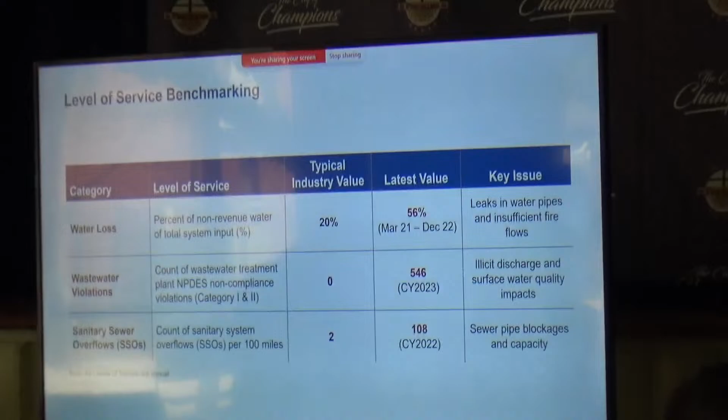So getting to the level of service part of this, just wanted to put this in perspective. A lot of these numbers are ones you're very familiar with, but we look at water loss, wastewater permit violations, and sanitary sewer overflows. From a level of service perspective, water loss is the percent of non-revenue water of your total system. A typical industry value for top quartile performance is about 20% or less. As you know, the Prichard system was at 56% in calendar year 22, so there's a lot of leakage in the water pipes and insufficient fire flows that we're trying to identify and prioritize.

On the wastewater National Pollutant Discharge Elimination System, or NPDES permit, the typical industry value targets 0 exceedances or violations. In calendar year 2023, the system had 546 violations, many related to monitoring and control, but some related to illicit discharge and surface water quality issues. Finally, on the sanitary sewer overflow side, a typical system might see 2 SSOs per 100 miles, and the Prichard system had over 100 in calendar year 2022.

So looking for those sewer pipe blockages and capacity issues as well.

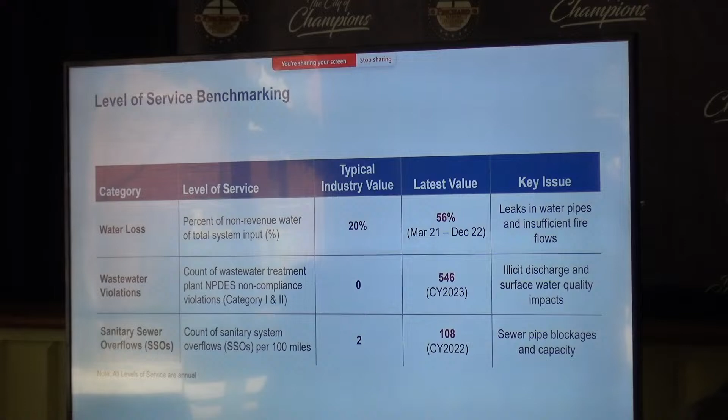Our risk assessment, using standard asset management approach, looks at two things: the probability of failure, which is the condition of the assets in your system, and the consequence of failure, which is the impact a system failure will have on the community and surrounding area. We combine those two things and multiply them together to come up with an overall risk score. So probability is condition, consequence is impact, and risk is the combination of those two.

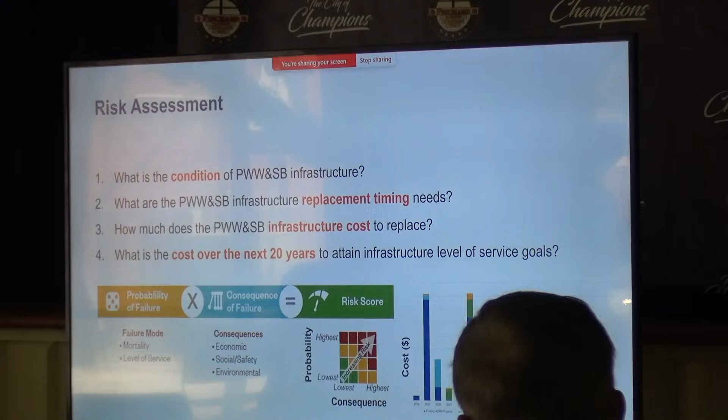At this point in time, I'm going to turn it over to Olivia August, who led our analysis of the linear assets in the system.

We've broken this presentation up into looking at the linear assets, or horizontal assets - your water pipes and sewer pipes - and then also the vertical side, which is all of your facilities: pump stations, water storage tanks, and wastewater treatment facilities. So at this point I'll turn it over to Olivia to cover our evaluation on the pipes.

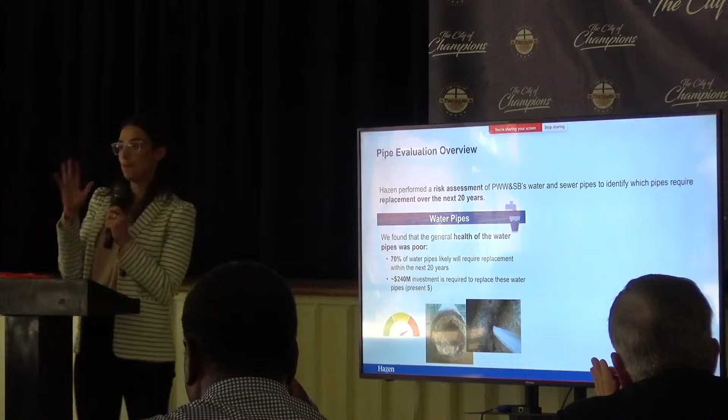Thank you, Ryan. As you said, I'll be covering today our assessment on water pipes and sewer pipes. I geek out on this stuff, this is what I do every day. As Jim said, we'll take questions at the end because this is kind of like a crash course in 4 months of work.

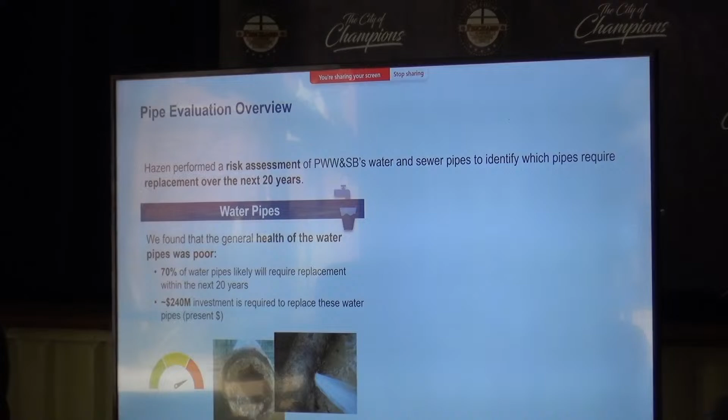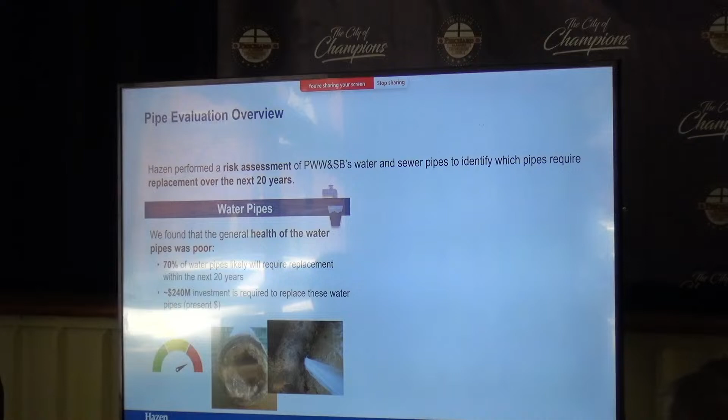Some overview of what I'll be presenting: we did a risk assessment and used that to inform replacement needs over the next 20 years. Starting with your water system, we found the general health of the system was poor. The first picture shows tuberculation, or buildup in a pipe that happens over time, meaning less flow can get through. This might result in pressure issues or insufficient fire flows, which are really critical. The second picture shows leaks - breaks or leaks, which result in extensive water loss.

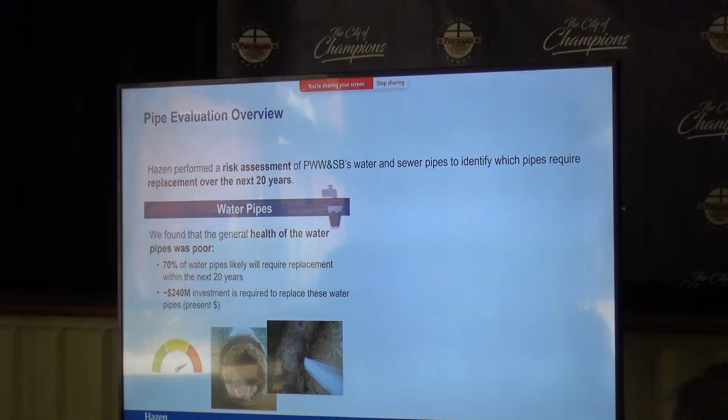Overall, we found that 70% of the system would be recommended for replacement over the next 20 years, and that total cost for replacement would be around $240 million. I'll talk a little bit more about how we got that number, but that's just an overview up front.

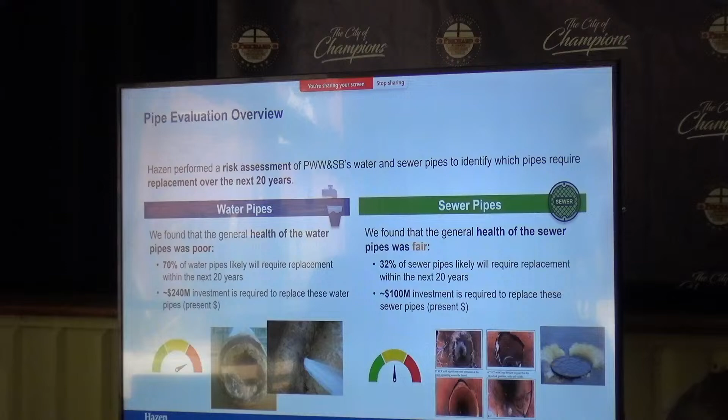Awesome. So Ryan gave a great background on how we calculate risk. We start with probability of failure, or what is the condition of your pipes. We can't go see them because they're buried in the ground - there are ways, but for our assessment, we looked first at data we had, such as the age of the pipe. That's really important in determining its condition, along with the material, whether there's corrosion potential, and known maintenance issues.

The Lovejoy Loop project is a great example where a combination of these factors occurred. The secondary criteria we used is more performance-based.

So we looked at modeled fire flows and head loss. We looked at historical sanitary sewer overflows. We also looked at the modeled pipe surcharges and force main velocity. And so that tells you your condition of your pipe.

But there's a difference between a small pipe failing in an open field and a large pipe failing under a major highway or in front of a hospital. And that's where consequence comes in. That says, what is the impact of this pipe failing? So not every pipe failing, the impact changes.

Some of the factors we looked at when considering that impact are: what would the impact to customers look like? What critical facilities are impacted? What are the impacts to the environment? Is this close to a creek that might be impacted if there's sewer flows? What is the traffic impact? What's the road that this pipe is nearest to? The constructability, how easy will it be to repair the pipe if it does fail? And then, of course, the financial impact of that failure.

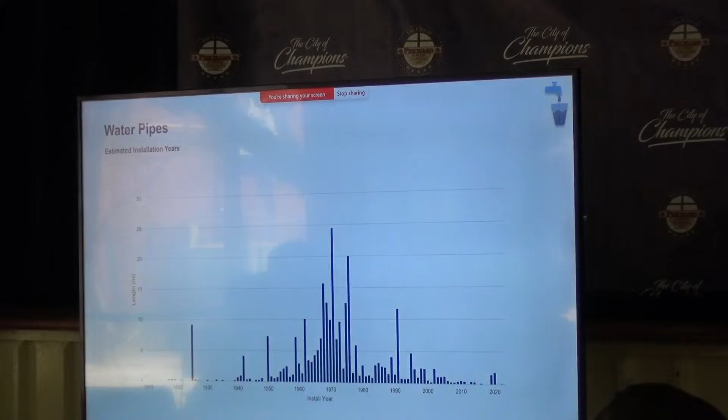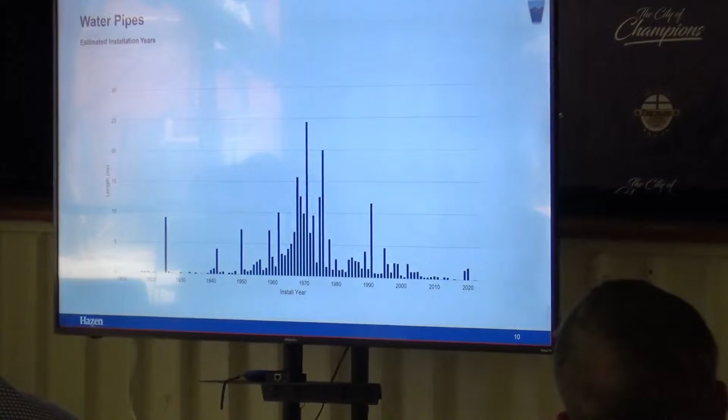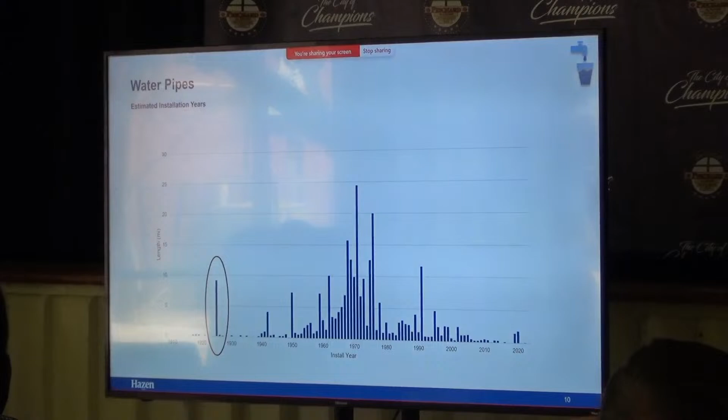Another factor when looking at calculating the condition or the probability of failure of a pipe is the installation year, or the pipe's age. You can see here the installation years of the water system, a majority installed between 1960 and 1980. However, I do want to point out that there's a significant portion of the system too that's installed as early as the 1920s. And so age is an important factor when considering condition.

As Ryan mentioned earlier, those are the ones you want to prioritize right away. You want to minimize the risk of your system. But when looking at it, because the second half of what we did was also projecting the next 20 years, risk is a component, but a larger one of what we use for calculating the next 20 years of replacement needs is that condition or the probability of failure.

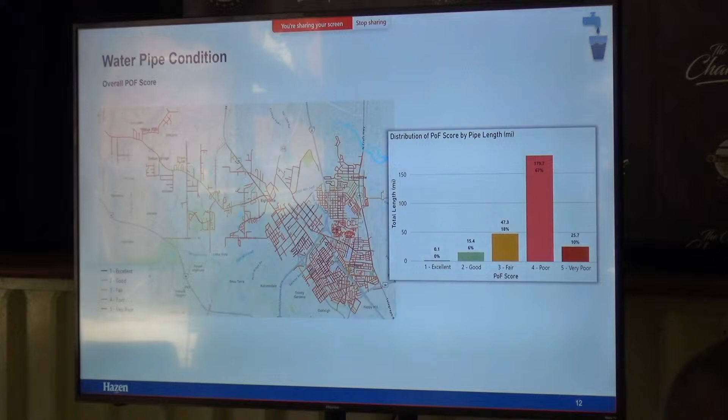So this map here shows you your probability of failure. You'll see over 70% are 4 or 5, meaning that they're either in poor condition or very poor condition. So this is really what drove our replacement recommendations, which you'll see in total we're recommending 188 miles of pipe replacement, approximately 70% of the water system length, which if replaced today would be around $240 million.

I also want to highlight, you've already started on some of this work. There's 8 million dollars of projects like the Lovejoy Loop that are already in process to address some of your highest risk pipes in the system.

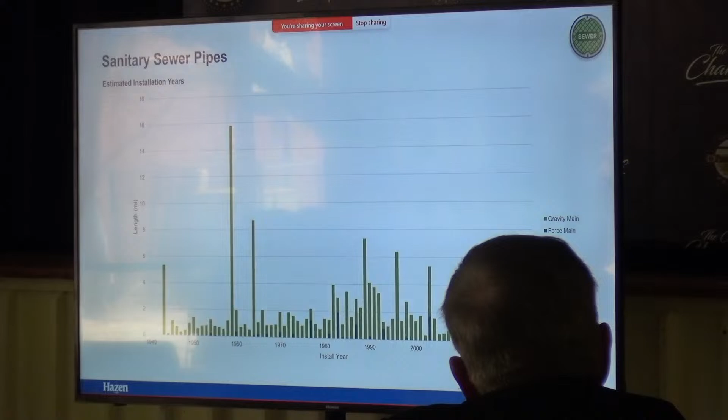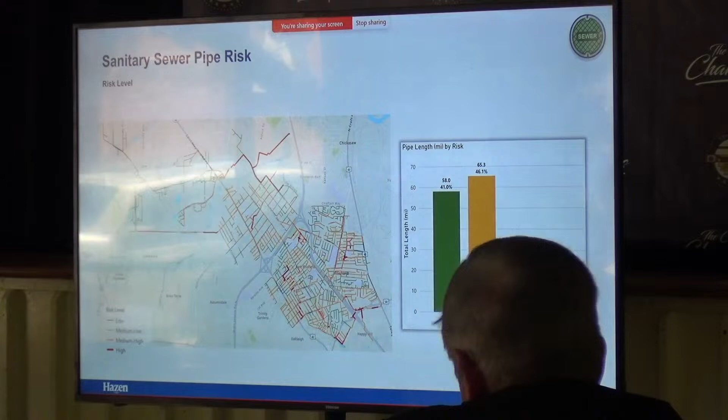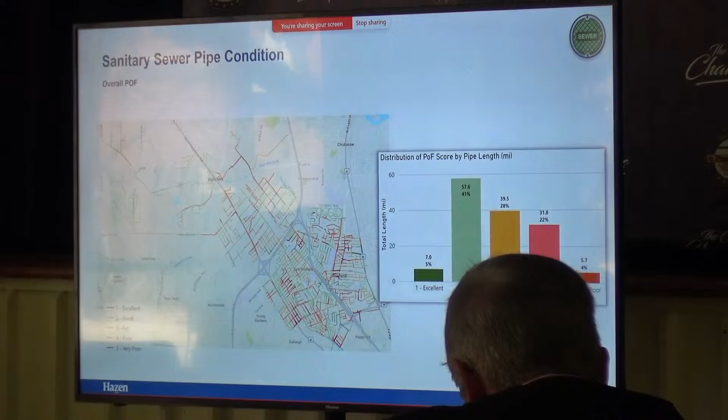That's a snapshot of today. To project the next 20 years of needs, we focused on the condition or the probability of failure. You can see here approximately 30% of the system is either in poor or very poor condition. These are what drive our recommendations for replacement over the next 20 years.

That inflated value is closer to $144 million. So what that means in a yearly investment, that would be close to about $5 million per year in sewer pipe replacement that would be inflated over time.

So I wanted to mention as well, as part of your water system evaluation, there's an ongoing leak detection assessment that ASTERRA is performing. That's going to give you really granular data on where the leaks are, so you can prioritize replacing water pipes based on greatest leaks. We're recommending that a similar assessment is done with your sewer system.

So a condition assessment program would look something like a camera inspection or a CCTV of your sewer pipes. This can typically be done each year, a portion of your system, so maybe over a 10-year period, you have camera inspections of all 100% of your system.

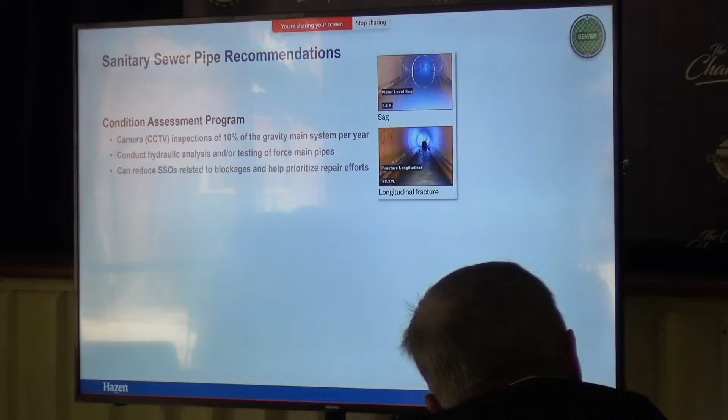And what this really, the information this gives you, it's boots on the ground or a little robot camera in the pipe showing you exactly what the condition is. Oftentimes you'll find that a pipe you thought needed full replacement, maybe it just needs to be lined, or maybe it's a point repair. So this information will give you better refinement into your replacement needs and will ensure that pipes with the greatest structural defects are being prioritized for replacement.

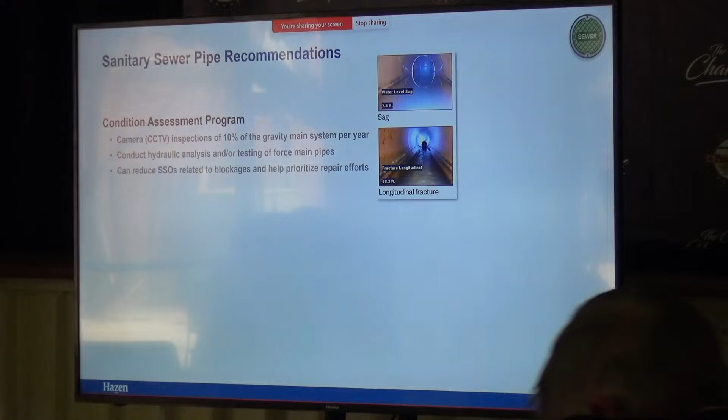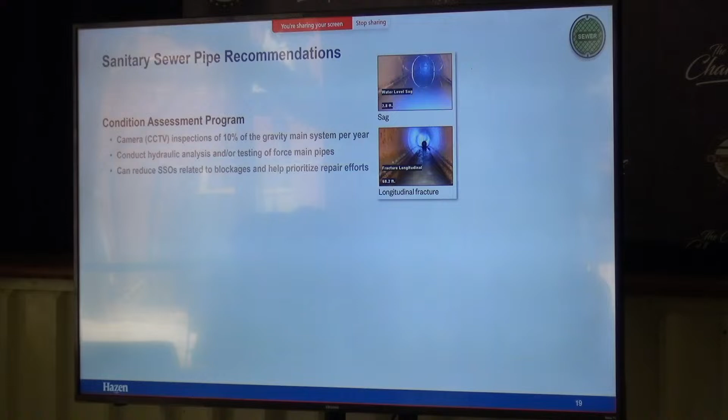Additionally, a benefit from this is also reducing sanitary sewer overflows. Oftentimes they can be caused by blockages in your system, and identifying those through these camera inspections can be very helpful in determining and removing those blockages before a sanitary sewer overflow can occur.

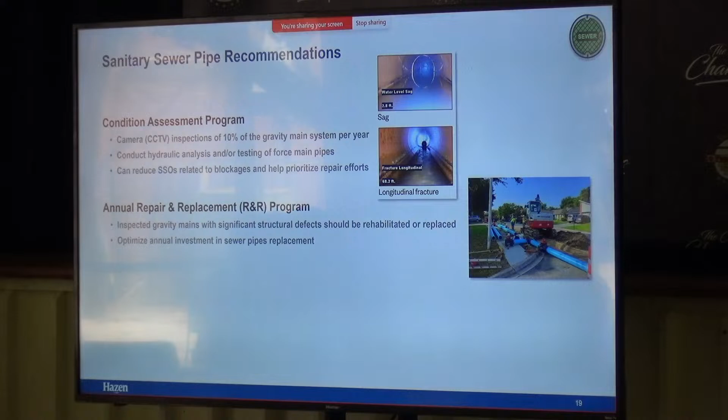So we're recommending that force mains and gravity mains are assessed, and that information can be used to inform an annual repair and replacement program. So this would use the results of those condition assessments, take the highest priority that was found based on the assessment, and that would be the priority for that year's replacement.

What this does is it optimizes your investment. It makes sure that every dollar is going to the pipes with the greatest need, and that you're spending the amount of money that's needed, fine-tuning what that replacement might look like.

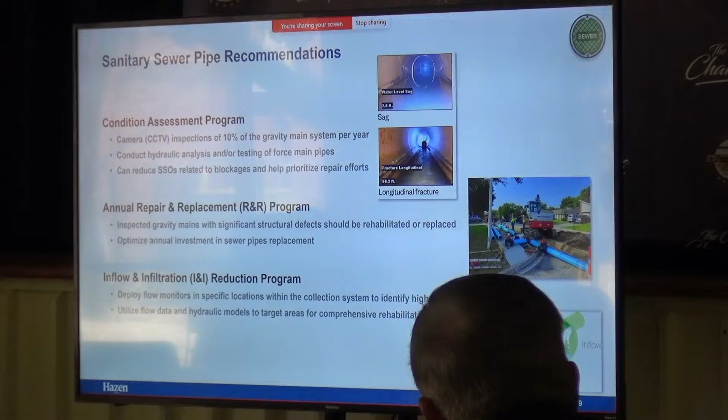The last program I want to recommend is inflow and infiltration. So what inflow and infiltration means, and I kind of showed you a picture in earlier slides of cracks in a sewer system, is when groundwater or stormwater actually enters your sewer system. The issue with that is sometimes it can overwhelm your wastewater treatment plants. A lot more water and flow is going to them than they can handle.

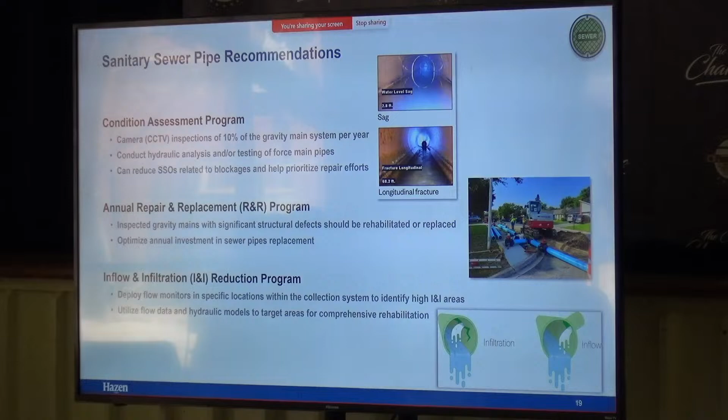The second is that it could also reduce the capacity in your sewer system. So the sanitary sewer overflows I talked about earlier could be exacerbated by the stress the inflow and infiltration are causing. So our recommendation is combine flow monitoring with some hydraulic modeling to really identify where in the system this is a problem, and then targeting those areas with comprehensive rehabilitation.

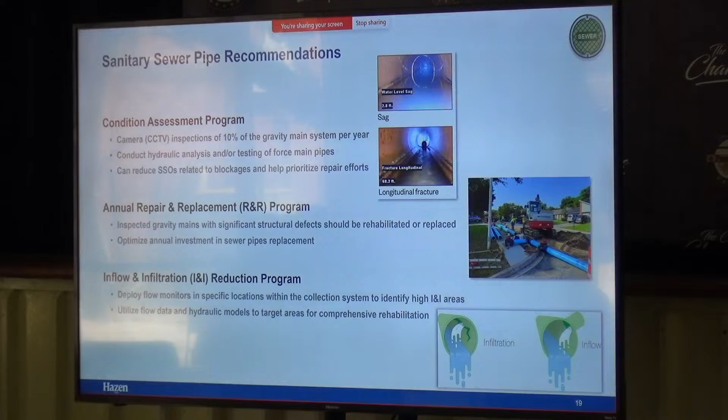All right, and with that, I will hand it over to Shelby to talk about your facilities.

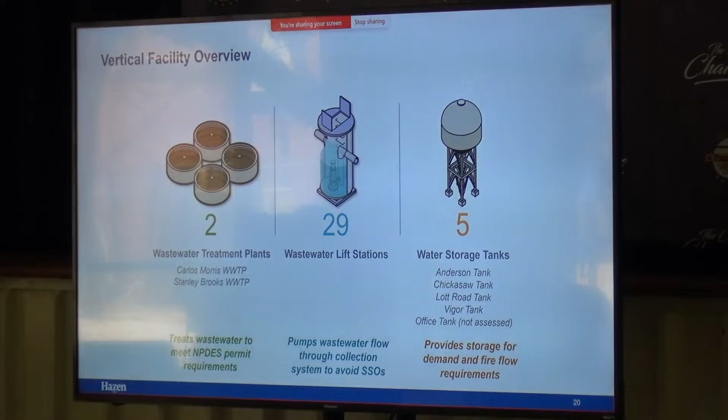Yes. Okay, awesome. So Olivia just walked through the piping system for Prichard, and now we're going to shift gears a little bit to what we call vertical asset management. And what that is focused on are the different facilities that are within your wastewater and water treatment systems, and all of the equipment that is comprised within these facilities. So the good thing about vertical assets or equipment is that we are able to visually assess these.

They're not buried infrastructure like piping. So Hazen mobilized a field team that went on site and performed condition assessment at the various facilities listed on the screen, starting off with 2 wastewater treatment plants, Carlos Morris and Stanley Brooks.

The purpose of wastewater treatment plants is to treat wastewater to make sure you're meeting NPDES permit requirements. We also assessed 29 wastewater lift stations. These lift stations pump flow through your wastewater collection systems to the treatment plants.

In addition, there are 5 storage tanks for your water distribution system. Hazen only performed assessment on 4 of those since the office tank is planned to be taken offline and demoed in the near term, so that was not assessed by our team. The storage tank provides storage for demand and also fire flow requirements.

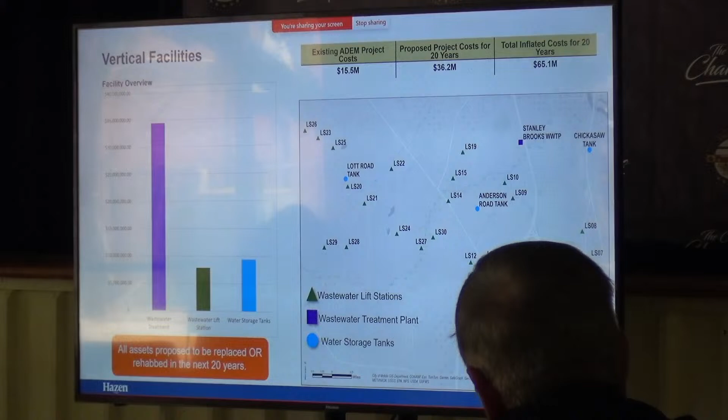So in total, over the next 20 years, these costs come to a total of $65 million, and we will get into the specifics for each of the different facility types.

The treatment plant was found to have some deficiencies with treatment. What does that mean for you all? With treatment deficiencies, wastewater is coming into the plant, and if the plant is not able to treat the flow to the adequate levels required by the permit, there are going to be illicit discharges into waterways.

So all of this is just saying that the treatment processes are not adequately treating the wastewater. There's stress on downstream processes of the plant, but also discharging wastewater that has not been treated to requirements. There were some other deficiencies noted on site, like flooded vaults, caving sidewalks, and a failed hydrant as well.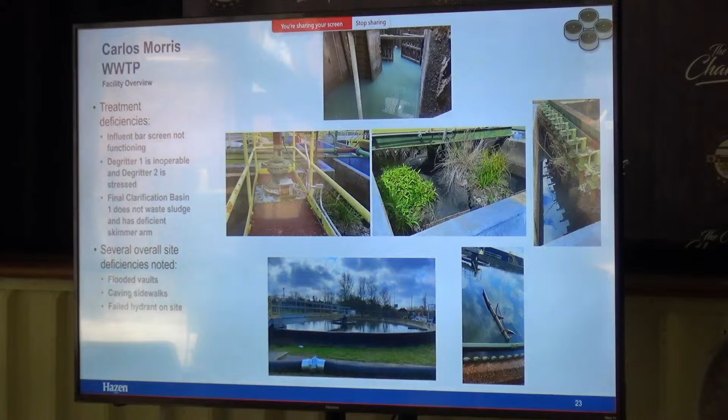And there are some projects already underway. John had opened up discussing some of those projects currently being designed for the Carlos Morris wastewater treatment plant, addressing the influent pump station and degritter structures, which you saw some pictures of on the last slide. In total, there will be around $20.4 million worth of improvements required for this plant.

That was something noticed throughout this plant - several dismantled assets or equipment not able to treat the wastewater the way it should, because there are missing components critical for the process to work. In addition, there was a trickling filter that was not functioning as a treatment process, and flow was really just passing through that particular basin.

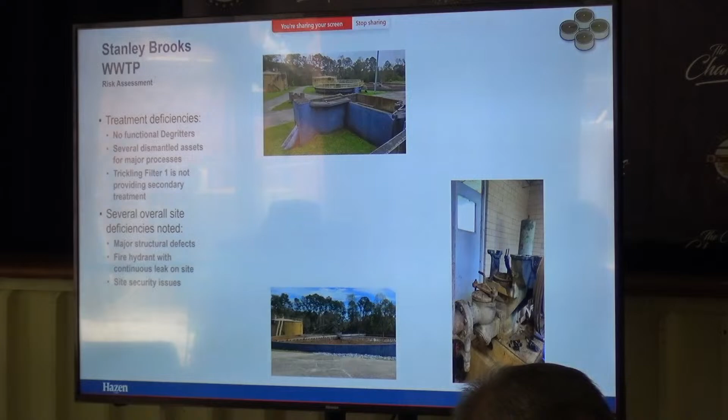Some other deficiencies were noted on site: several major structural defects, some hydrants with major leaking issues, and some site security issues.

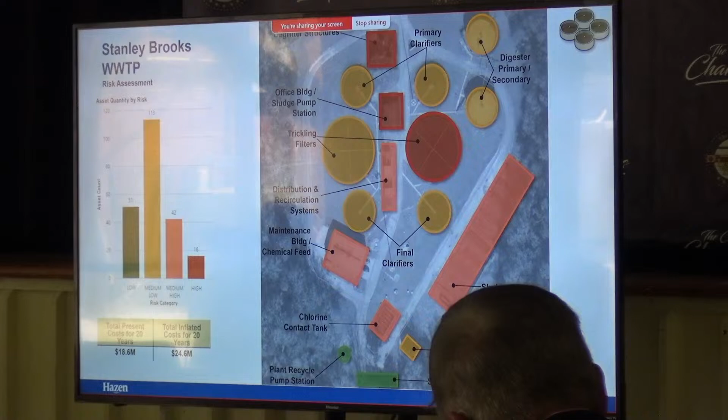This is the overall map for Stanley Brooks wastewater treatment plant, drawing your attention to the red and pink areas for different processes that had deficiencies to be addressed in the near term. For the next 20 years, the cost is around $18.6 million to address those in present value, but if you inflate those dollars over the 20-year period for the timing they may be incurred, that's closer to $25 million for Stanley Brooks.

For sewer lift stations, the one thing I'll mention is that their primary goal is to pump flow in your collection system, so the pumps are the most critical assets or equipment within each of these facilities.

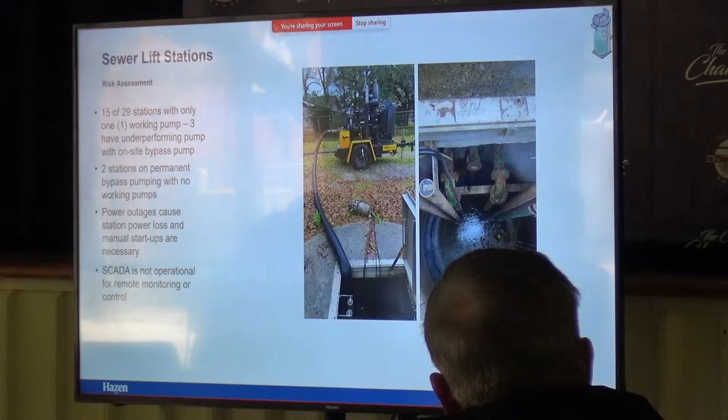15 of the 29 stations visited only had one functional pump, when 2 or sometimes 3 is typical at a lift station. This means there is severe stress on pumps where one is out of service. Several stations were being supported by bypass pumping, and 2 stations were fully supported by bypass pumping with no operating pumps on site.

This is a picture showing you bypass pumping. Bypass pumping is expensive, and it's not really intended to be a long-term solution - it's meant to provide relief in specific use cases.

Another deficiency noted for sewer lift stations was with power outages. When power is re-energized back to the system, the lift stations have to be manually prompted to turn back on. That was a problem, as well as the ability to monitor the stations remotely, which is important for keeping tabs on any alarms that may come up.

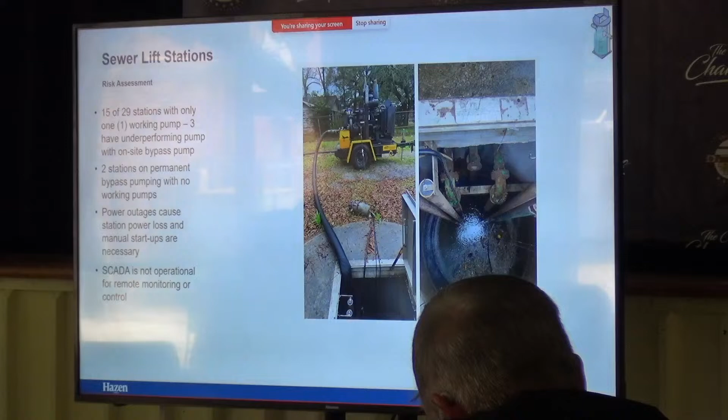The last group of assets I'll talk about is water storage tanks. All of the tanks are part of projects already underway, which John mentioned earlier, requiring recoatings to restore the structures, as well as several valve replacements or installation of new valves for better system isolation and control, and also SCADA improvements for the tanks.

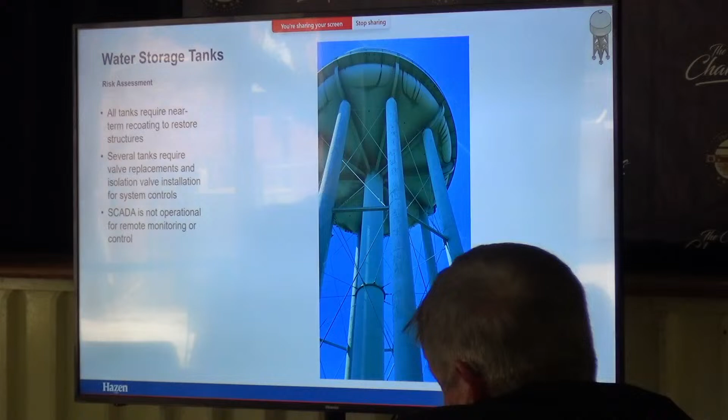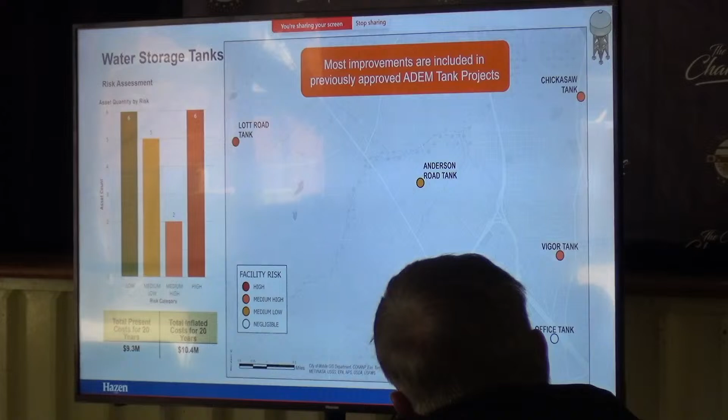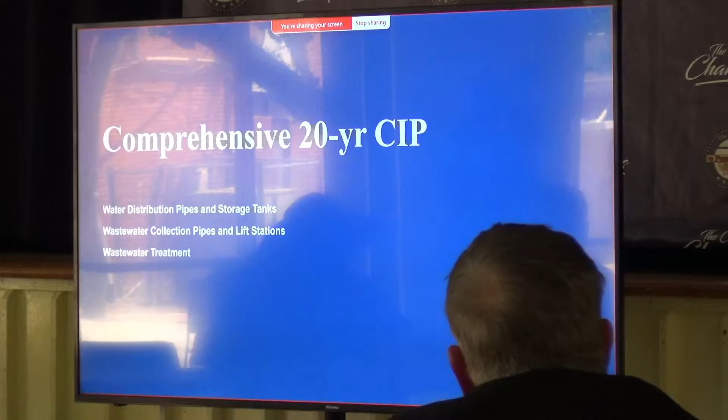Now, Olivia talked through the piping section, and I talked a lot about your different facilities in your system. Now we want to make sure we're communicating comprehensively what that need looks like for wastewater collections, treatment, as well as water distribution.

This shows the breakdown of combining your pipes as well as the facility needs for the next 20 years. Overall, for the next 20 years, in present dollars, that need is around $405 million. And if you look at what the inflated costs would be, knowing some of these projects are midterm or more long-term out in that 20-year projection, that cost comes to a total closer to $550 million.

On average, for the systems we've discussed - wastewater collection, wastewater treatment, and water distribution - this means around $20 to $21 million is needed to be invested into your systems per year.

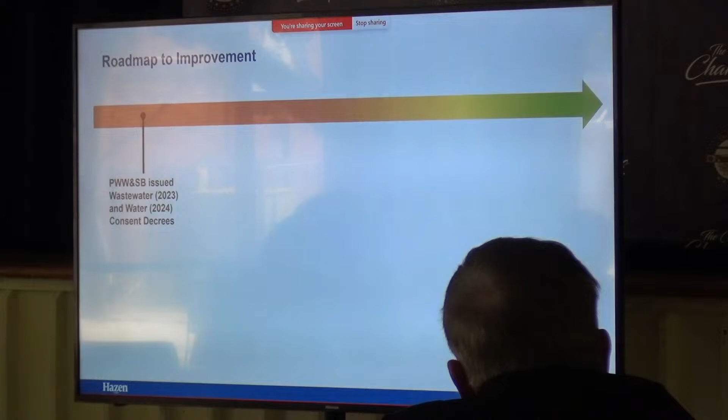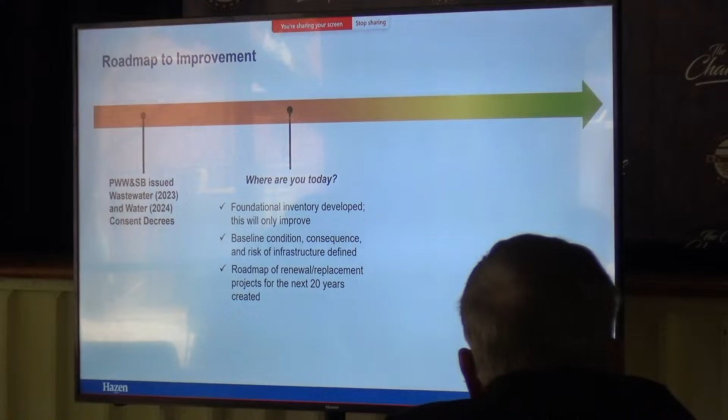So just kind of rounding out the roadmap to improvement of the system. As you're well aware, we issued the wastewater and water consent decrees over the last couple of years. Moving into this assessment, we've done the foundational inventory. That'll only improve as continued work occurs within the system. As part of this study, we've developed the baseline condition, consequence, and risk assessment results for you, and laid out this roadmap of renewal and replacement needs over the next 20 years. And then where are you headed?

Well, as Olivia talked about, continued flow monitoring. We have flow monitors in the system, leak detection. You do have approximately $6 million of projects that are already approved by ADEM for funding of the storage tanks and other facility projects. We do advise that, as John mentioned at the beginning, we were able to get our eyes on all of the facility and vertical assets.

The assessment that we did on your pipe network was based on available information and industry knowledge of how pipes degrade. So we do recommend that some detailed condition assessment be performed on your critical pipes, your most critical or highest risk pipes, just to validate the findings and calibrate the model that we developed. And then implementation of the proposed replacement projects, starting with those that mitigate the largest amount of risk for your system. We also know there's financial and affordability work going on, and we want to make sure this needs assessment fits the affordability limits that might be available from the customer base as well.

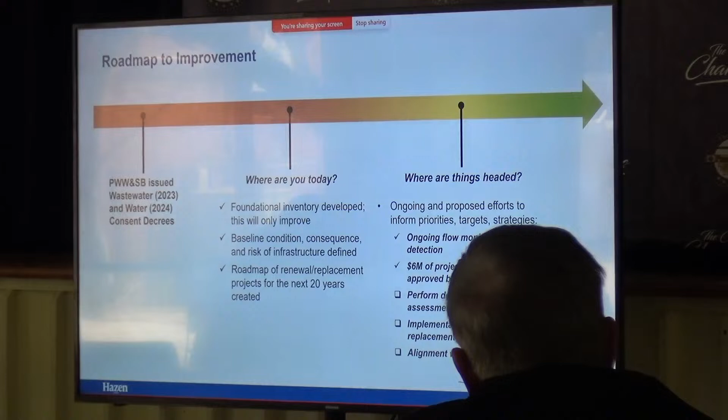So there's still some work to do to see how we lay out this program in a realistic fashion. But we do have all of the information that you need to really prioritize those projects at this point.

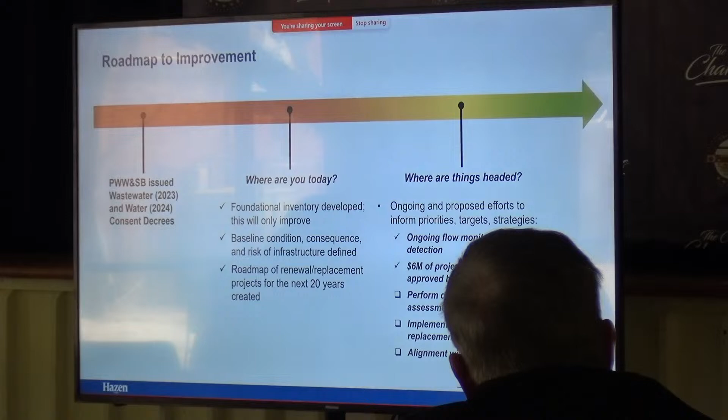And before we transition to the water source alternatives discussion, we wanted to pause and see if there were any questions that we might be able to answer on the asset management section first.

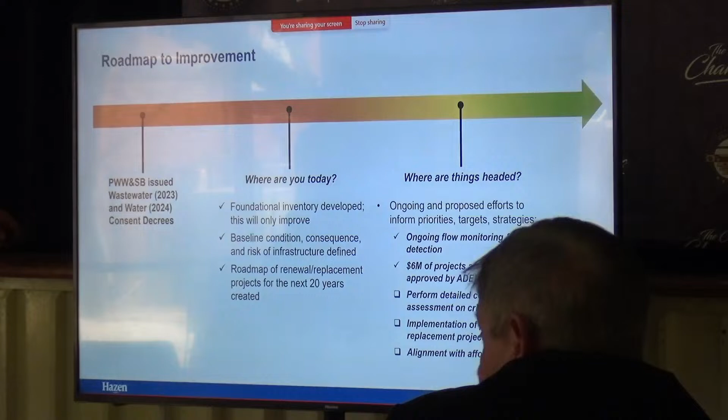So let me jump in here for takeaways. Of course, the big takeaway is $20 million a year for the next 20 years, and that $20 million is present worth, that goes up every year with inflation. That's $12 million on the water system, $5 million on the sewer pipes, and another $3 million on the facility assets.

I've tried to be as transparent as I possibly could since I came here. I said in one of the first meetings, I've operated hundreds of water systems all across the country. The condition of this water system was as bad as any water and wastewater system I'd ever seen, and this kind of verifies it. To have to spend $20 to $25 million on a system of this size is huge compared to other systems around the country. But there's a reason for that.

As you saw from when the pipe was put in, when sewer pipe was put in, there's not been investment here. This has been decades of lack of investment and, frankly, decades of mismanagement that resulted in this. So we're now paying the price.

And obviously the challenge moving forward, the challenge we have as a group, and I have to make an alternatives evaluation and recommendations by the end of July, is how do we achieve this? Given the financial capabilities of this community, this is going to be very, very tough to achieve without a lot of help coming from the outside.

I'll just kind of leave it at that, because you'll also see as we go through the water source evaluations, we're also paying the price for past sins. I don't know how else to say it, the lack of investment and mismanagement. That's going to impact the water source as well, and we'll talk about that when we get through. But any questions, Dr. Morse?

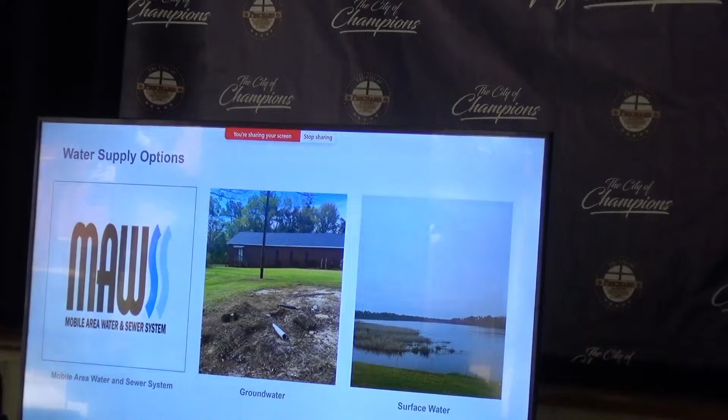So I'll go through these quickly. On the water supply alternatives, which is required as part of the consent order, we looked at 3 different supplies: staying with MAWSS, going to groundwater, or looking at surface water alternatives.

As far as water supply goes from MAWSS, I think everybody knows the story, we pay about $2.75 per 1,000 gallons. MAWSS has been supplying Prichard for quite a while. We've contacted MAWSS and talked to them about standing capacity, which is something we'll discuss a little bit more later. They're not really concerns, but there are conditions that in the long term MAWSS can increase their rates, and we'd be subject to those rate increases as well.

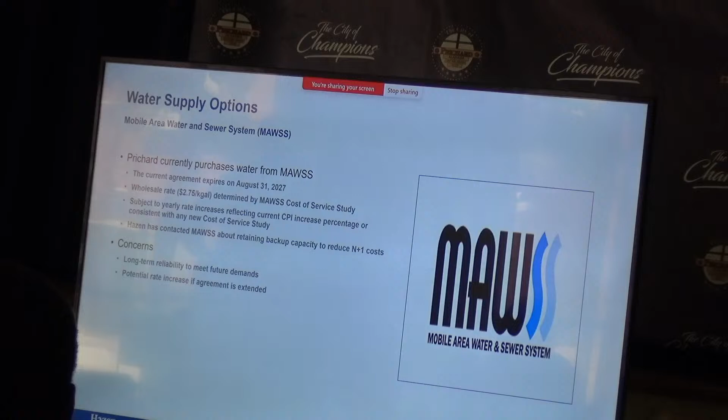To take care of the other one quickly, surface water supplies are pretty limited here in southern Alabama. Big Creek Lake is really owned by MAWSS, all of the capacity in that system is owned by MAWSS. Also, if we were to build an intake, if they would allow us to build an intake and put a pipeline in all the way to Prichard and then treat the water here, that would be a surface water treatment plant. It's a very expensive, complicated plant to build.

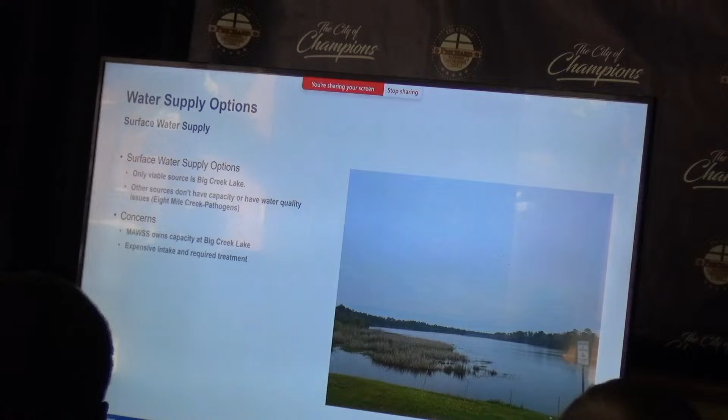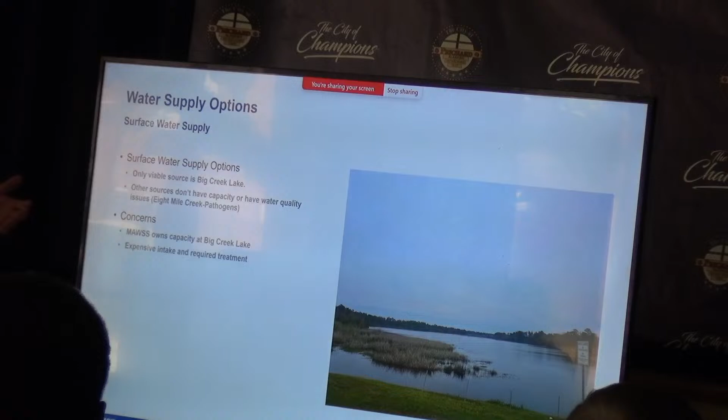We're going to talk about groundwater plants, which are much easier to build, you can build the wells here in town. But a surface water alternative, just qualitatively, is very difficult to conceive, so I just point that out. As far as groundwater supplies go, there is limited data here in the area, but there are some old Scott paper wells I found out about today.

Kimberly Clark has had a well system in southern Alabama, so we have contacted them. We also did a test well project last year where we looked at what well capacity could be. The water quality isn't that great for groundwater.

It's high in iron, it's relatively high in manganese, which could actually degrade once we started pumping out of the systems. It's relatively low in pH, which also translates to some infrastructure issues. The pH of this groundwater is pretty low.

We've contacted ADEM and we've talked to them about drilling permits. They have gone to a more nationwide program, a nationwide paradigm, where they're looking at the technical, management, and financial capacity of an entity to be able to run their systems, both technically and from a management perspective.

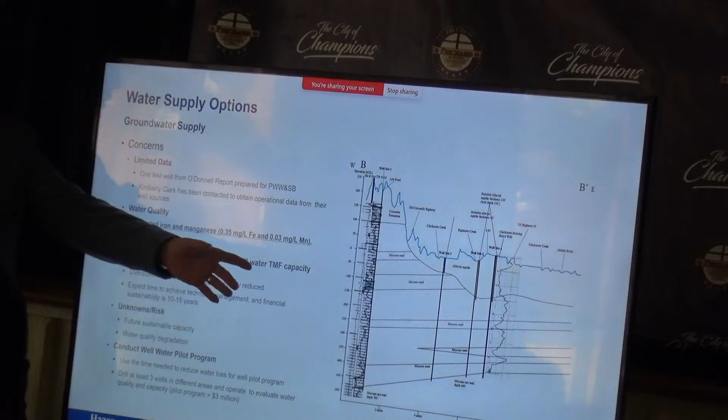So their comment to us was they probably would not issue a drilling permit until we had satisfied the requirements of the TMF paradigm they're working within. So that would probably take about 10 to 15 years for us to satisfy those.

One example would be: did we go in and look at the wells and make sure they had the yield and water quality over the long term that we could sustain and treat? And with some of the things Olivia and Shelby were talking about, could we get the water losses down to a number more in line with the national average, say 20% or 15%, on the drinking water side? So those two things don't make groundwater impossible, but they push it out in the timeline.

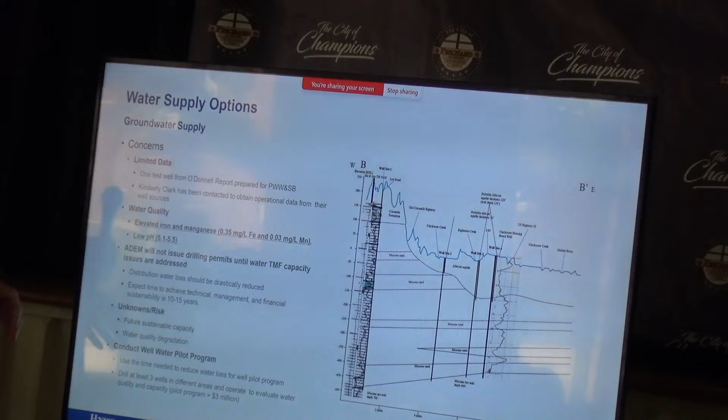And again, I've mentioned the sustainable capacity, the water quality. In order to deal with these issues, we would have to do a pilot program where we would drill some wells and actually look at what the water quality would be and what the capacity would be over the long term.

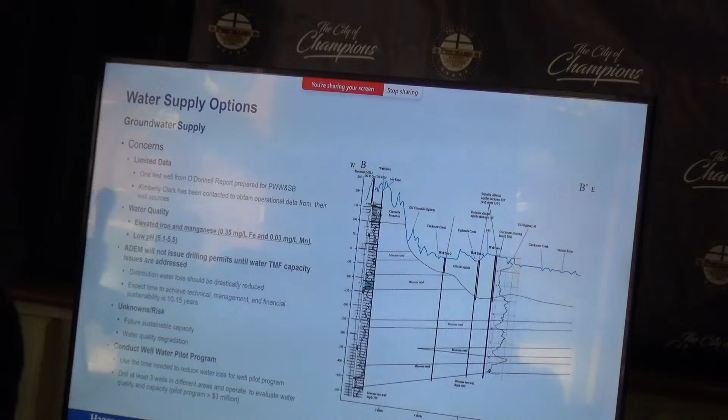So with all that said, we looked at the water quality and the typical treatment schemes you'd use for a plant like this, or a water quality like this: sequestration, which we don't really think is possible because of the water quality conditions; aeration and filtration, which is a possible alternative; chlorine oxidation and filtration, these are ways you'd oxidize the contaminants and then remove them by filtration; and a specialty filter called the manganese greensand filter.

So we went through the treatment options. We looked at centralizing these facilities, bringing them from a bunch of wells to one location, or building them at the wellheads, which is done at a lot of systems around the country.

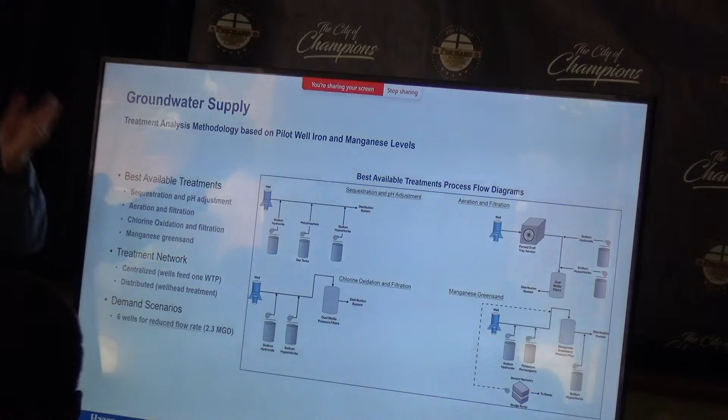What we think we would try to do is: right now you're bringing in about 4.6 to 4.8 million gallons a day. With the time period it would take to comply with the ADEM requirements, you probably need something closer to 2.2 to 2.3 million gallons a day. So that gives you the same indication of how much water is being lost in the system through those leaks and defects everybody else was talking about. We think the plant, a long-term plant, would be closer to this level than to the capacity you see today.

To give you an idea of how we cost estimated this, we identified land near the points of entry, the POEs, so we could reduce infrastructure cost. If we were going to drill a well, we'd drill it near where a MAWSS entrance or MAWSS meter was already located, so we didn't have to redo the distribution system to get the water around town. We would just come in at the same locations with wells in the appropriate locations.

We think we'd need about 6 wells to get to 2.3 million gallons a day with N+1 redundancy. Again, having MAWSS as a backup - you'll see in a couple of minutes that it's an expensive alternative, but in many cases we do provide our own redundancy within the system. So that would be 6 wells for 2.3 million gallons a day, with 1 well as a spare, using centralized and distributed wells depending on what was most cost effective.

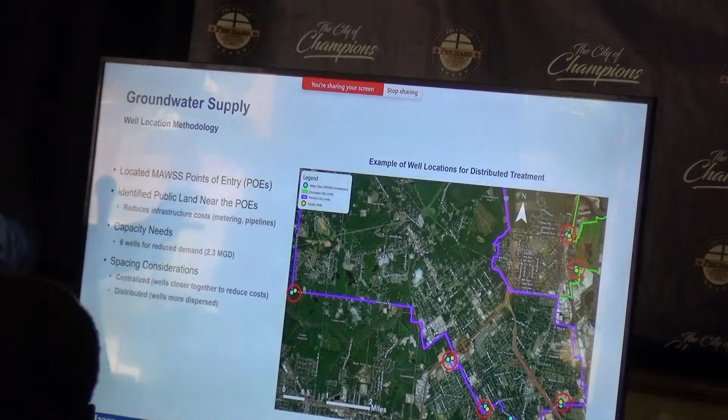Sequestration, again, is not recommended because of the water quality issues, but the other options are viable.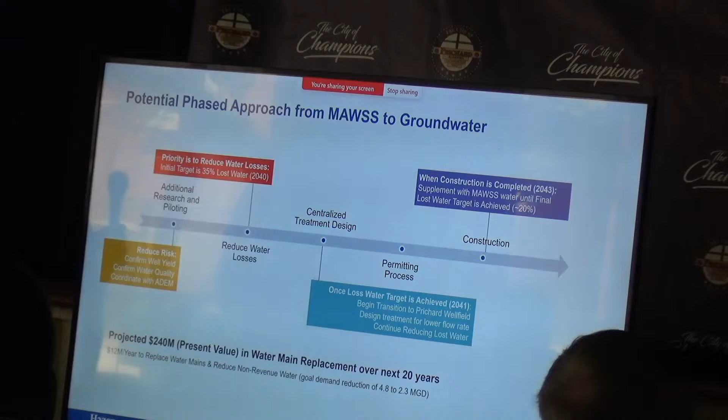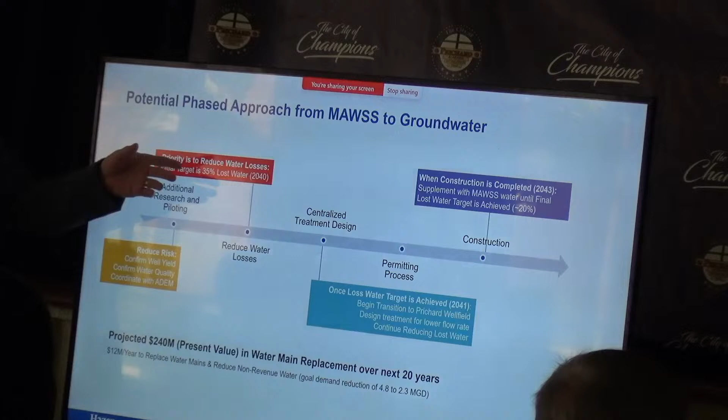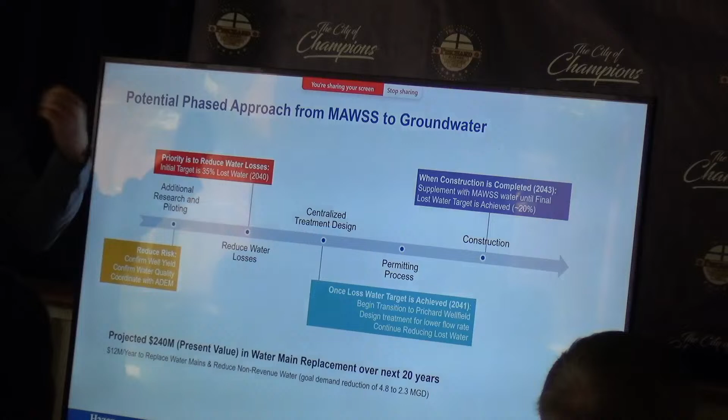So what we were proposing was that in order to reduce the risk of drilling the wells and not having capacity, and not being able to confirm the water quality, would be to do a well program where you could pilot some of that well functioning. At the same time, do all of the things that Shelby and Olivia were talking about to reduce this water loss to some trigger amount. I picked 35%, I don't know if anybody else said that number, but I thought that would be a number where in 2040 you could go get the drilling permits and start to do the work if you wanted to build some kind of centralized or decentralized treatment system.

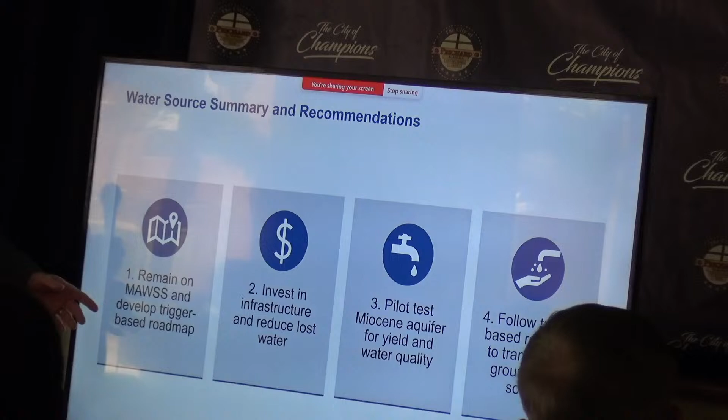You'd have to go through the permitting process and then get to completed construction. So this schedule was really just based on some triggers that would allow you to move to the next step. And so that's what it really is in summary: remain on MAWSS, develop the roadmap, invest in the infrastructure, pilot for the wells to make sure we can get the quality and quantity we want, and then just follow that trigger schedule into the next decade or two.

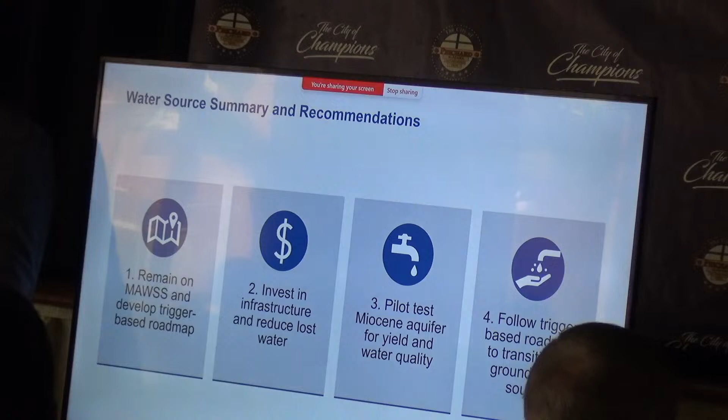I think that's the last slide for me, John.

Yeah, thanks, Jason. Can we go back to slide 39? I want to give you guys some takeaways here.

So I could live with what he calls the N+1. But I actually was surprised how cost-effective groundwater could be.

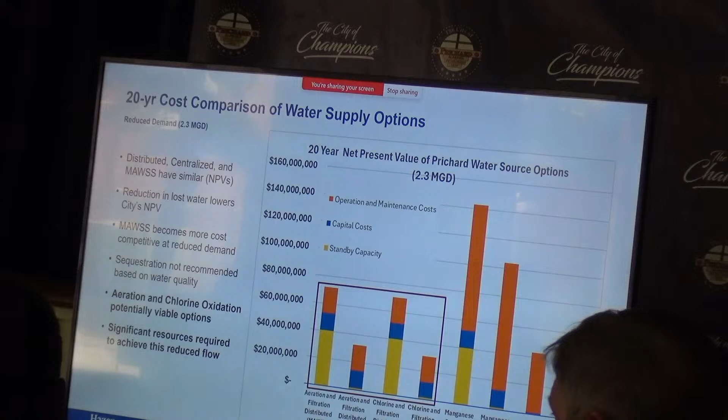This is where we're paying for our past sins, because we went to ADEM and I personally talked to them about this and said, if we came for drilling permits, what would you do? Groundwater's cheaper, what would you do? And they say, you would not get a drilling permit from us until you meet the TMF capacity. In other words, we're not going to give you money because you are not a sustainable system. You've not done the investment you need to do historically. You've mismanaged the system. We're not going to give you any more money until you can prove to us that you can operate the system properly.

And one of those components is leakage, and right now we're close to 60% leakage. They would want us to get down to a more reasonable level, whether it's 35 or 30 or whatever, and we're not going to get there without 10 or 15 years of investment. So groundwater is a viable long-term option here, maybe starting, as Jason said, 2040 or 2043. But we've got no chance of getting groundwater right now, even though there's potential that it could be close and cost effective.

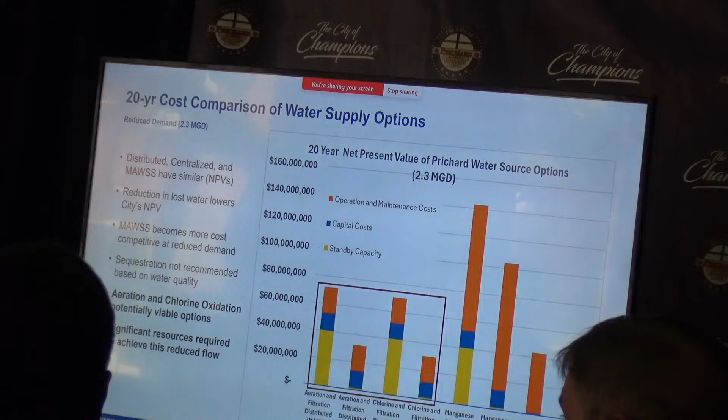And let me add to what John said, we took the number down to 2.3 million gallons a day because we assumed you guys wouldn't want to build a plant that was going to waste water. So we actually brought the cost down. If you tried to build the capacity today, it would be higher. That's what we found.

Let me ask you a question. You said we're already buying $4.55 per 1,000 gallons. Okay, if we can go there where MAWSS hooks up and come to Prichard and put our stuff there, and again build our own plant since we're losing a lot of water, should we save money by doing our own thing, ready to hook up with MAWSS and treat our own water? There's a rate study person on this job who is a little bit...

Let me repeat the question. The question was, would we reduce the actual cost per thousand if we controlled our own system and built our own system? When you say build our own system, that means building our own treatment plant.

I'm assuming they hook up. So Big Creek Lake is owned by MAWSS, and they have access to that water for their future yield. But it would be extremely expensive for us to put an intake in there, pipe that here, and treat that water. We didn't even put cost estimates together on surface supply, it was so much more expensive than MAWSS. What we are saying is that groundwater is potentially competitive.

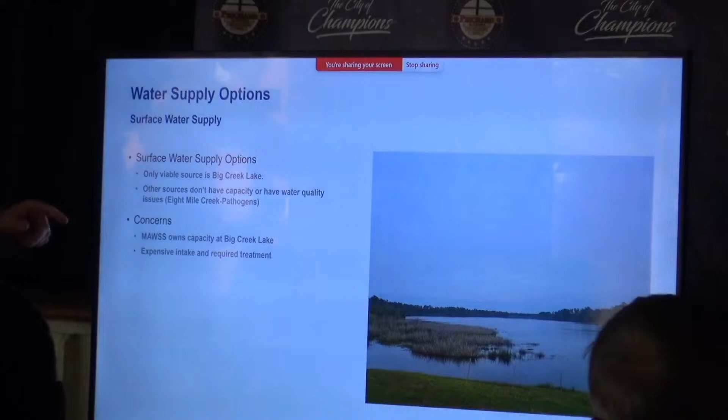So the water quality we looked at showed elevated iron and manganese concentrations, and low pH. These two things mean you're going to have to oxidize and filter, and modify the pH of the water to get it stable before it goes into the distribution system.

So that was, I believe, approximately 5 potential locations that groundwater could come from. Right, so we checked that one, or did we check? We're assuming that the rest of them are the same.

We are looking for data, and I was talking to Mr. Bryant today. We were looking for data from other wells in the area, with all the historical wells. It does strike me that Kimberly-Clark or Scott Paper had a system here that they have since abandoned and are going to MAWSS as well. We've put in some requests to them to get that data.

So is the problem that ADEM is having is what you just shared? No, not at all. The problem ADEM's having is basically the technical management and financial capacity issues — right now the utility is not sustainable, and they're not going to give money. They're not going to give a drilling permit to a utility in the condition that Prichard's in.

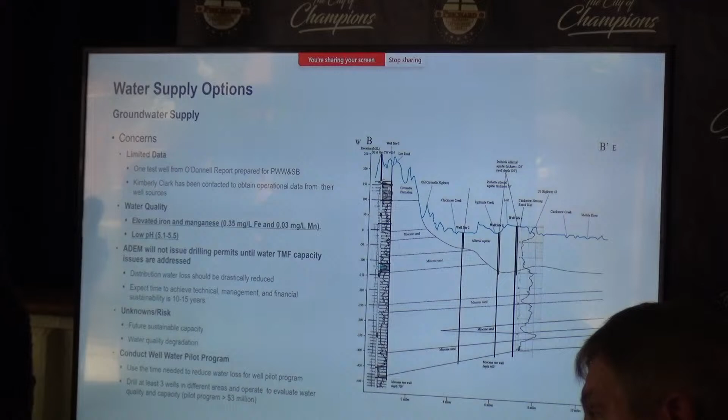Is that common? It's becoming more and more common. And state entities are requiring that because of what's happened in different locations. The management has become the problem, not a specific water quality issue or violation. It's become the management of the whole system. So for that reason, they've taken on this broader approach to managing utilities.

And how long has this been going on? Probably in these last few years.

I mean, to tell me on Shelton Beach Road, where Scott Paper Company had a water system, Shelton Beach Road into the creek — you said MAWSS got over that too? MAWSS didn't get hold of that. They switched over to MAWSS. So they actually switched over and buy water from MAWSS.

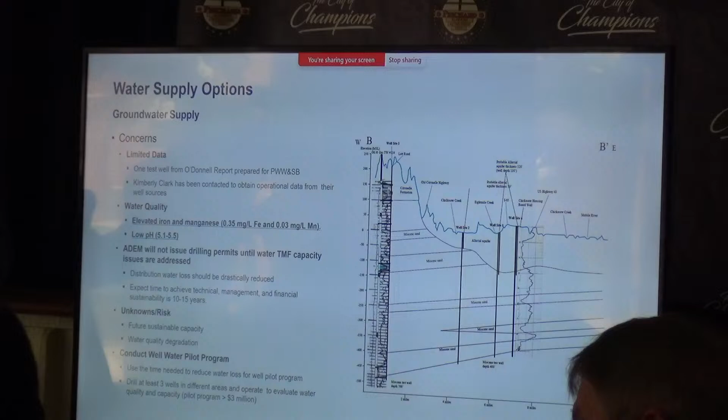The other thing, Mr. Mayor, is that building this plant at 2.3 — if you go to the cost estimate slide, Nate — building this plant at 2.3 gets us down to this version. But again, if we had to build capacity at 4.8, where we are today, this number would be higher than MAWSS. So that's what it is. It's getting the number down.

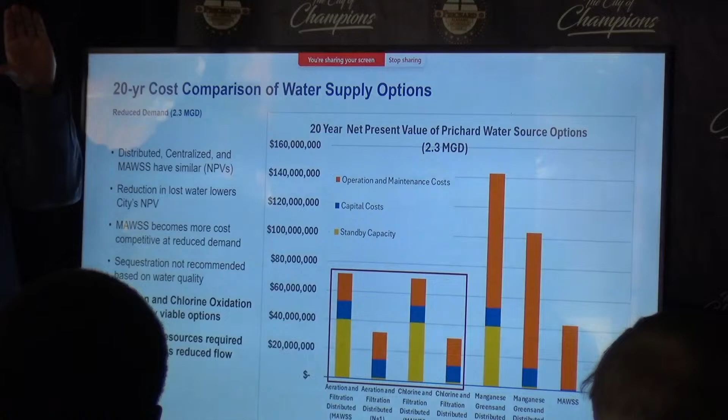And it's going to take — Olivia might know better than me — but it's probably going to take about, for the money you're going to spend, about a 4 to 6% reduction as you spend money. That unaccounted-for water, the non-revenue water, is going to come down. Where you really want to be is at the lowest point of that, but also at the most efficient point for production. And that number is probably 10 to 15 years out, given how much work you can actually do in town and what we have programmed as the projects.

So wouldn't another takeaway be that the cost of drilling wells isn't as expensive as infrastructure to stop waste? So given the present value of money, spending more dollars on the infrastructure side is actually cheaper. It'll grow faster cost of the wells because it's a lower starting point. Right, until you hit that point out there, like the 13th year.

Then, not all of a sudden, but you will reach the point where the treatment will become the balancing act, and you could offset. If you only had $1 and you put it in wells, it costs you $3 in infrastructure because it's such a bigger investment and cost. Exactly, it's only going to escalate higher. Right, you want to get that plant down as small as possible. If you ever were to build one, you want to make it as small as possible.

You said it's going to take us 6 years with spending levels we have now to reach — not the losses, it could take you 10 years to get down to a level. The losses are just very high. And I think if you go back to Ryan's original slide, the one that showed you guys at 59%, I think, unaccounted-for water — 56%. So 56%, that's a high number.

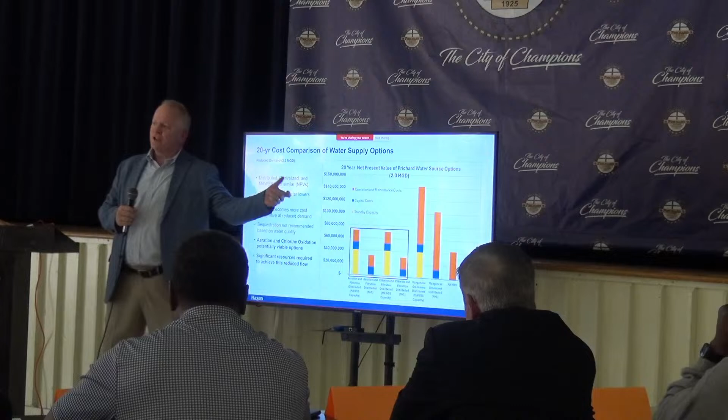And at $2.75 per thousand, that's where the real money is right now to go after. It's relatively low-hanging fruit because it's pipeline work — you can get it done quick. But it's also a guess. You can't tell exactly how far you're going to come down that curve when you start making investments. You can't see where all the— these ladies are pretty good at prioritizing these jobs. They know how to pick the right jobs, the early ones. But it is.

It could be less than 10 years, or it could be more than 10 years. You don't know. The 4% a year is a swag, just me kind of averaging it out.

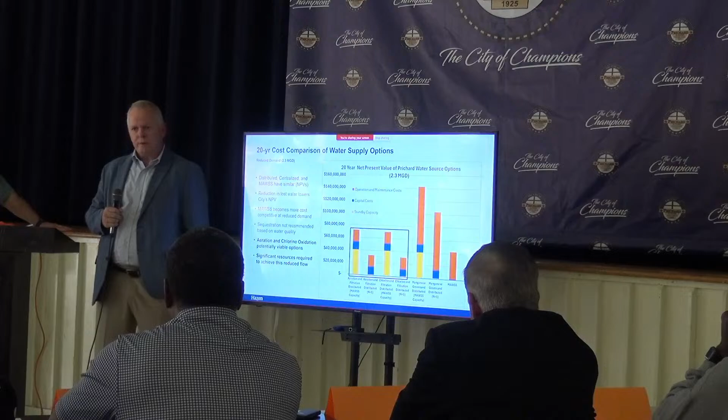Certainly it is, but MAWSS's price is based on what they call a cost of service study. You look at all the capital components of your system and how they're allocated to your residential, commercial, and industrial customers, fire flows, and operating costs, making sure each customer pays their fair share. Through a very formal cost of service study, they came up with the $2.75, and I've reviewed that study, and it is legitimate. So to move off of that price would be very, very difficult.

We started buying water, I think, and we didn't negotiate 25 years ago. That cost has gone up. Well, let me tell you the real problem here: we buy water from MAWSS at $2.75, and we charge our customers $9. So, yeah, there's your issue.